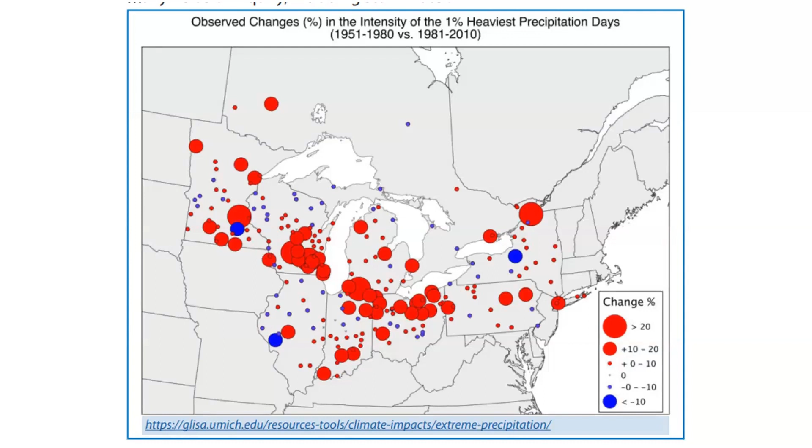And you can see that in this illustration here, because where the lakefronts are, you're getting these 20% changes in the intensity of storm events. You look down where we're at, you've even got some actual reductions anticipated. So there's not really going to be a statewide solution to this. We really need to look locally at what kind of changes are necessary to build in that resiliency.

So we're already approving, building, and designing plans that are perhaps already at that extreme of the 90% confidence interval. So that's something I want to point out here. And we should be looking at ways to build in some resiliency with our current stormwater. So with that, I'm going to move to Geddy and get you powered up here.

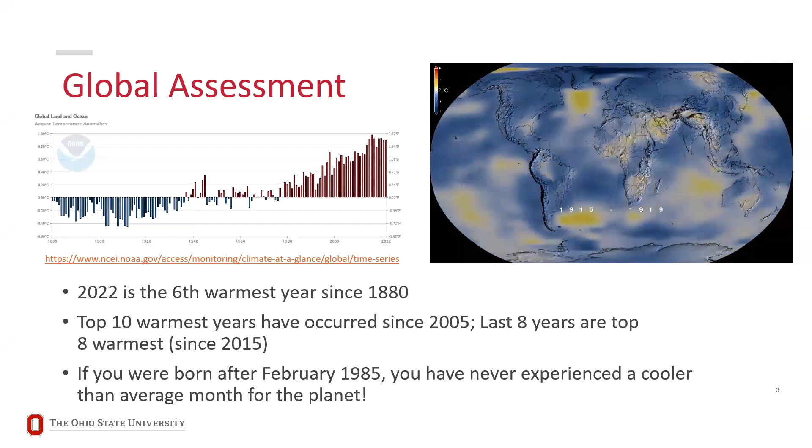In fact, the top 10 warmest years on Earth have all occurred since 2005, and the last 8 years, 2015 through 2022, have all been the top 8 warmest. So this is 2022 back to about 2015. So why does that matter when it comes to water? A warmer atmosphere can hold more water vapor. And as a result, that impacts the patterns and intensity of precipitation we see on Earth.

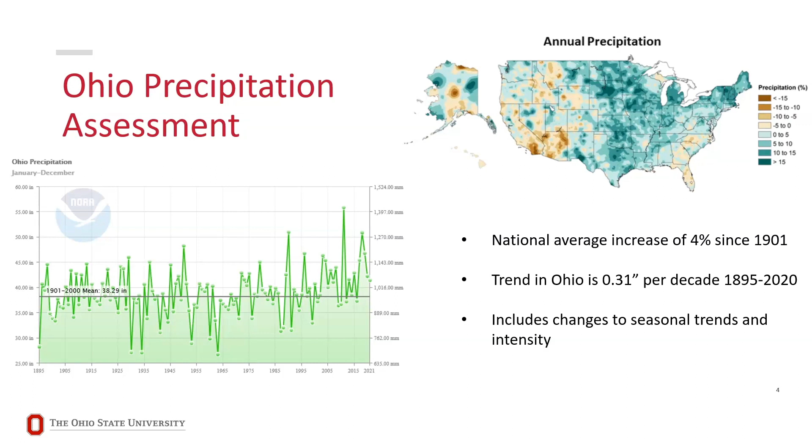In Ohio, this is no different. We've seen changes. The trend in Ohio's precipitation in the climatic record, which in our state goes to 1895, is on the tune of about 0.3 of an inch per decade. So this isn't just plus or minus 0.31 every 10 years. This is intensity and seasonal changes and fluctuations, changes in patterns that we normally see and we normally build our infrastructure around. And you can see this looking at season to season.

So using key months as proxies for seasonal changes, looking at our most recent 30-year climate period, which is 1991 to 2020. These are the NCEI 30-year periods that we use for averages. This is 1991 to 2020 minus the previous 30-year record, 1981 to 2010. Looking at January, we can see around a 10% increase in precipitation in our state in the Ohio Valley. So indicative of wetter winters.

And this trend continues into the spring. So looking at April, we continue to see those greens, those 10, 15% changes, especially concentrated in the lower Ohio Valley and into the mid-Mississippi Valley.

As we move into summer, we see these changes start to kind of wash out, fade away, and we see a little bit of variability emerge. So pockets with green, kind of positive changes, but also some brown negative changes, some lighter browns mixed in with the greens. And by the time we get back to October and into the fall, we see the green start to make an appearance again within most of the state.

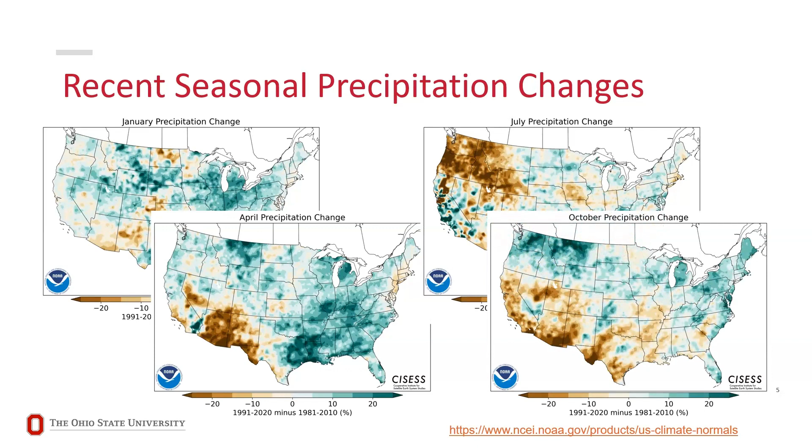So the key takeaway here is that we are experiencing wetter winters and springs, as well as increased precipitation variability locally in our state. We look even more localized, so looking at precipitation intensity in the Columbus area. On the left, we have extreme daily rainfall counts by half decade, or in other terms, the number of 1 inch or greater events experienced at Columbus over 5-year increments. So this is from 1950 to 2019. Each bar is about 5 years worth of events.

And you can see there's a fair amount of variability in the first half of this graph, but starting around the 1985 timeframe, we start to see a persistent upward trend in these bars. And I don't want you all to just look at the bars themselves, but I also want you to look at the breakdown of the colors, primarily this lime green color and this really pale green color. The lime green color are 2 to 3 inch rainfall events, and the pale green are 3 inch plus rainfall events. So these are significant, impactful rainfall events that are on the rise, not just rainfall itself, but the more extreme disruptive events that can overwhelm infrastructure and disrupt daily life.

Looking at this another way, on the right, we have percentage of annual precipitation greater than 1 inch. So what this is saying is essentially, what is the percentage of the total rainfall events each year caused by these 1 inch or greater rainfall events? This data goes from 1948 to 2020, so a similar-ish window. And this trend is also on the increase.

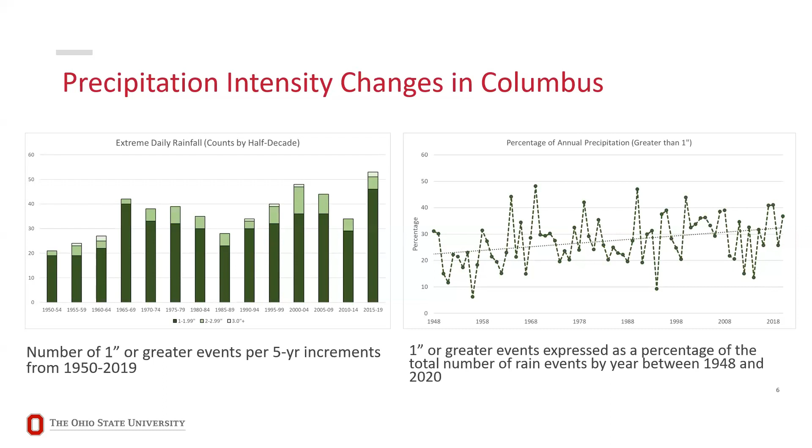At the beginning of this graph, you see a clustering of these points, kind of in the 20 to 30% of yearly events caused by these 1 inch or greater events. As we move closer to present day, that number increases to around 30 to 40%, a clustering of those points. See kind of at the end there. So we are seeing changes both in seasonal trends and in intensity. And as a result, this is causing impacts.

It's no surprise then if we look at our top 10 warmest and wettest years in Ohio, focusing here on the precipitation side, that a lot of these top 10 years are fairly recent. In fact, 8 of the top 10 wettest years in Ohio are after 1990, and 6 of these top 10 occur after the year 2000. So fairly recent turn of events here. And this in turn causes numerous direct and indirect impacts.

So Dave did a good job of setting this up for me. Atlas 14 is the official peer-reviewed record of precipitation frequency estimates for the United States and its affiliated territories, produced by the Weather Service. This was the data in Dave's graph that he was discussing moments ago. And this is where one of the indirect impacts really comes into play, because a lot of this guidance is used by you all in some way, shape, or form when it comes to infrastructure design, water engineering, whether it's stormwater, wastewater, other water utilities, etc. And what we're finding is that this data now is not accurately quantifying what we're seeing.

So Ohio is located within volume 2 of Atlas 14, which covers the Great Lakes and Mid-Atlantic. This was released in 2004, but the records of this data only cover up through December 2000. It integrates daily and hourly stations, and it integrates a fair amount of data, but then it stops, right? And we're all the way forward now here into May 2023. So almost 23 years of missing data.

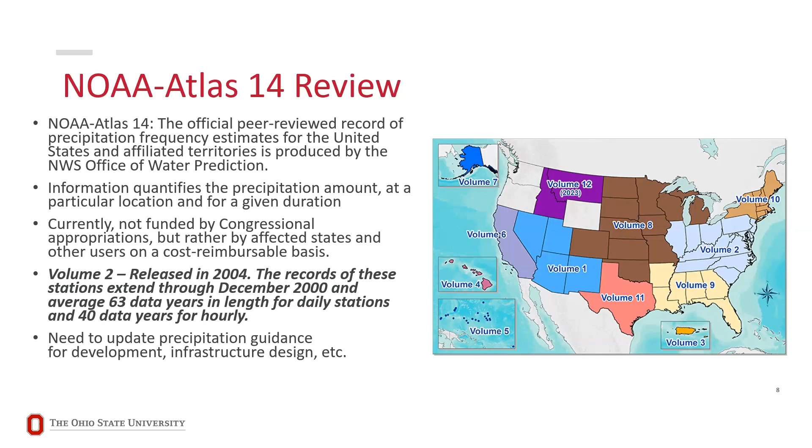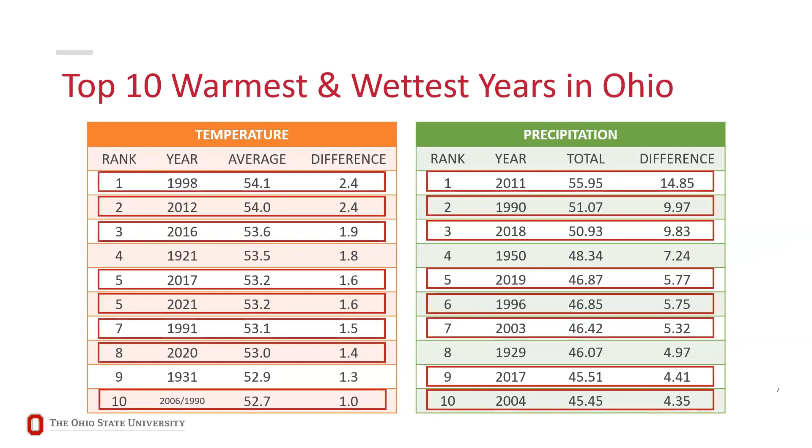But thankfully, we're not the only ones who recognize that. NOAA, within the last year, has put forth a national effort summary called Our Changing Precipitation, where it overviews this problem as well as a problem with the methodology within Atlas 14, which is that the guidance within this program is based on a concept known as temporal stationarity, which essentially assumes that extreme precipitation events do not change significantly over time. But looking at the data on these slides, we're learning that that's not the case, right? These events are changing over time. And as a result, that impacts our guidance.

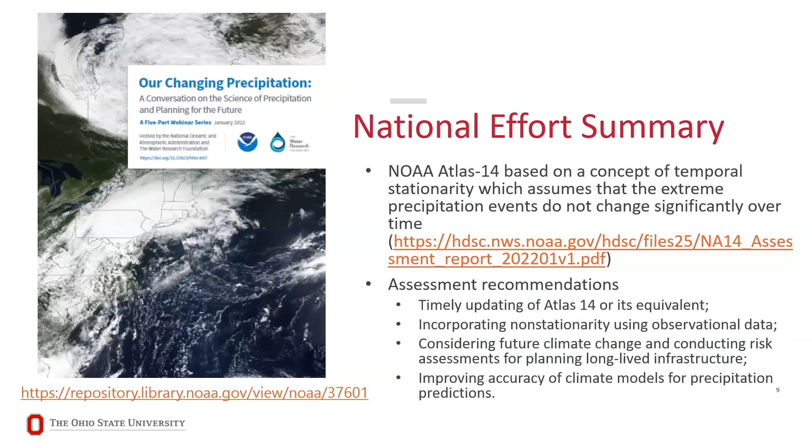So NOAA put forth a recommendation summary advocating for a timely updating of Atlas 14 or the development of an equivalent that incorporates non-stationarity and new observational data, as well as considerations for future climate change and risk assessments for long-lived infrastructure and design plans. There's also provisions in here to improve accuracy of climate models for precipitation predictions.

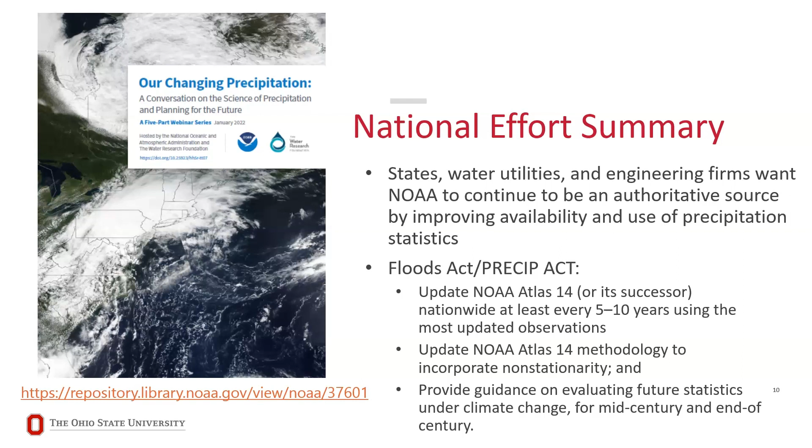And believe it or not, this has moved forward within the federal government. So at the end of last year, a majority of these bits and pieces were integrated into 2 pieces of legislation, the Floods Act and the Precip Act, which have been essentially approved and passed through Congress and have led to an official update of NOAA Atlas 14 or a successor program to be coming nationwide down the road and to be updated at least every 5 to 10 years. These updates will incorporate those methods of non-stationarity and evolving data and guidance that I have brought up here in this first portion. So are there any questions about this so far?

I have these checkpoints built in because there's a lot I want to go over, and I don't want to just cram all the questions to the end. So this is just kind of the overview of where we're at right now before I go into some of the work we're doing locally.

So the Atlas 14, is that being implemented now? And then Atlas 15 is coming, I heard 2027, is that? Yeah, so the updated Atlas program, whatever it may be called, right now it's in a national committee review, essentially. So it's working through the process of developing a methodology, getting approved by the National Academy Review. Thank you, Jason. So it's going through that process of being reviewed and implemented, but that process from the federal government side is very slow. It's very methodical, and odds are, yeah, 2027 at earliest for those official projections.

Those are just for Reader's Digest version of what that is. That provides guidance on precipitation. Yes. So it provides guidance on precipitation and probability of occurrence, basically. So when you look at NOAA Atlas 14 data, you essentially either get a recurrence curve or a tabular set of data. And within that data, you typically see precipitation amounts or depth in inches, and then average recurrence intervals. So when you hear an event was a 100-year event or a 500-year event, that's essentially a probability for the odds of that event to occur within your local region. It's not necessarily something that'll happen once every 500 years, but rather a 1 in 500 chance of occurrence.

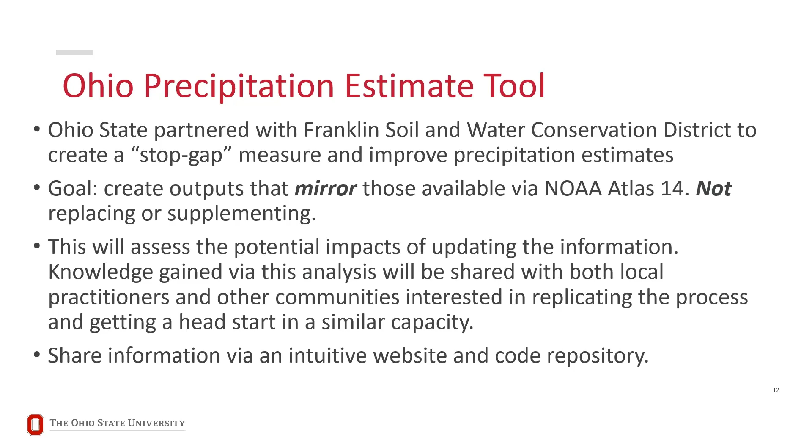This will assess the potential impacts of updating precipitation information, and knowledge gained via this analysis will be shared with both local practitioners and other communities who are interested in replicating this process or getting a head start in what changing precipitation projections may look like. And this will be shared via both an intuitive website and an accessible code repository.

So how do we do this, right? The best way to go about breaking down what we've done here is to compare some methodology first and then go into some of our results and then some of our outputs. So looking at Atlas 14 again, Atlas 14 uses daily and hourly station precipitation data. It then goes in and does a lot of statistical work.

So it utilizes a statistical method called a generalized extreme value function combined with some statistical regions called L regions to essentially fit a distribution function to precipitation data. Now, I was not a fan of statistics in high school or college, so I don't want to go too far into this rabbit hole.

But what you essentially need to know is that this is a method used to approximate models of maxima, or extremes of long sequences of variables. So it takes this long sequence of precipitation data and models it to bring forward the maximums of projections. This does really well, but it leaves little room for variability, especially regarding extreme or changing precipitation events.

Not to mention that Atlas 14 also had to make multiple consistency adjustments with their data to get things to fit properly and to process properly. This includes adjusting daily and hourly station quantiles where there may have been overlaps. Same thing with the confidence intervals. If there are overlaps or missing gaps, these things had to be adjusted.

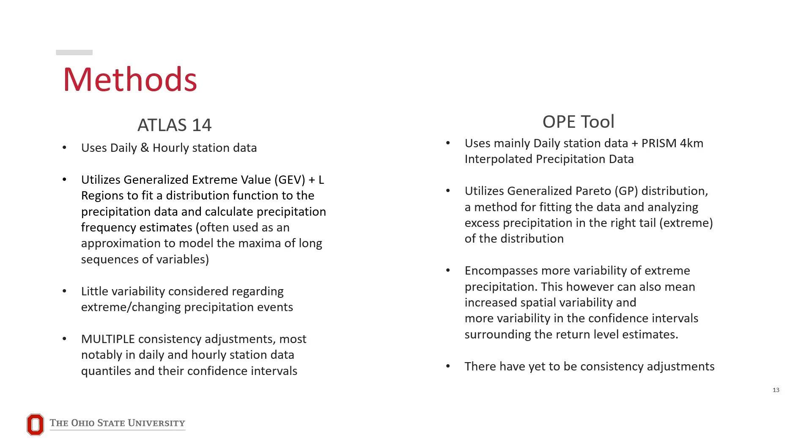As far as choosing stations, there are 6 active cooperative or ASOS stations in the Columbus region in Franklin County. Each one has a varying historical record. John Glenn International Airport is known as Columbus's climate site. That's where the Weather Service operated and maintained station is, and it has a record from 1948 to present. So that is one station we included in our analysis.

There's a station up in Westerville, which is a cooperative observer station, which is, again, a cooperation between the Weather Service and private observers. This record is the longest available record in Franklin County.

This is 1896 to present, still in operation and still provides data to this day. So we included that station. But then other stations pose some problems for us. There's a station up in Easton that had a record of 1975 to present, but it had so much missing data in it that it was essentially unusable. It had over 775 missing data points just looking within the last 30 years or so.

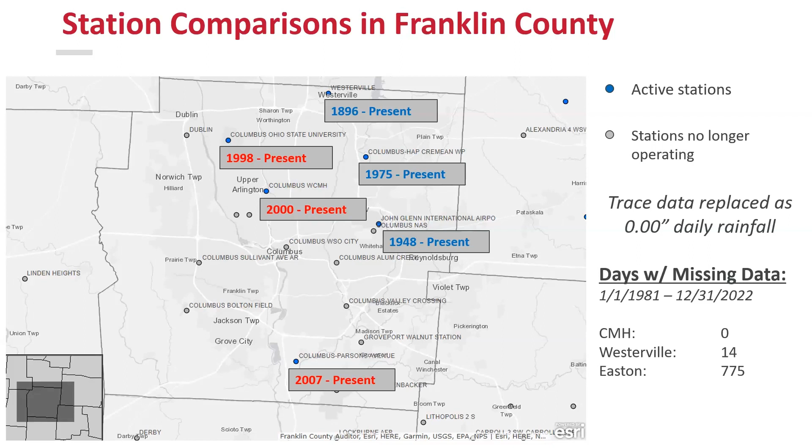And there are other stations such as KOSU and WCMH and Parsons Avenue that are still active and are relatively new, but this brings the drawback that the records at these stations are not very long. So they're not very suitable for the analysis that we were trying to do. However, there are also numerous stations in the Columbus area that operated in the past and are no longer operating.

So we found a station on the west side of Columbus at Sullivant Avenue that had an intact record from 1952 to 1983. When 1983 came around, the station fell out of operation. So what we did is we took this historical record of this station and attached the PRISM data set to it to fill in the gap from the 1983 station quit date to the present day.

And this provided us with some proof of concept for using this PRISM data set to help supplement current and active station data. And as a result, we ended up with 3 stations in our final analysis: Columbus CMH, Westerville, and Sullivant Avenue.

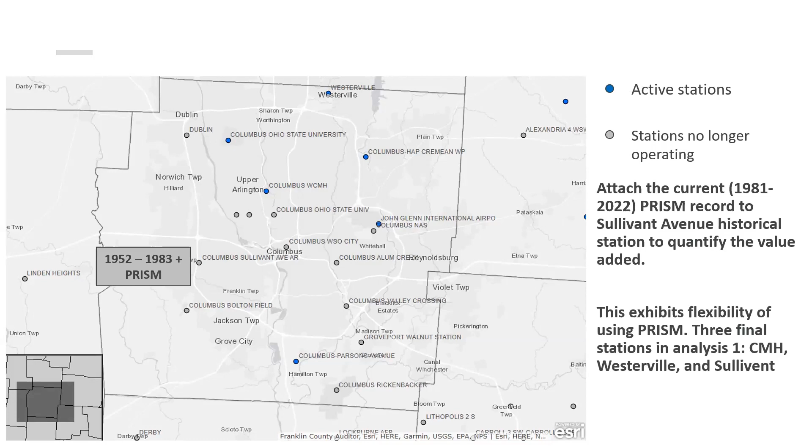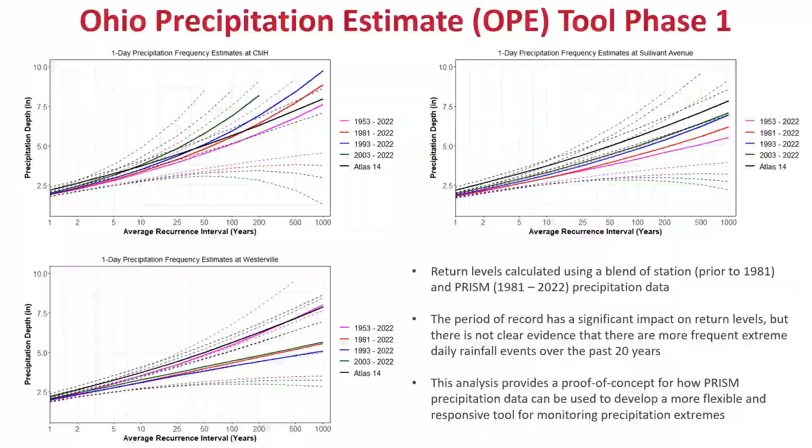So we then integrated this into a user interface website. This is the Ohio Precipitation Tool website. It comes with a map of the stations that we included in our analysis, as well as tabular and graphic outputs for precipitation frequency estimates at our stations. The tabular data includes 95% lower and upper confidence intervals, as well as the estimates and return periods.

And we have drop downs and graphic selection for stations, as well as different periods and sources that I went through in the previous slide. So we have Atlas 14 in here, but then we have our 1953 to 2022 analysis, and then the PRISM data set, and then most recent 20 and 30 year intervals.

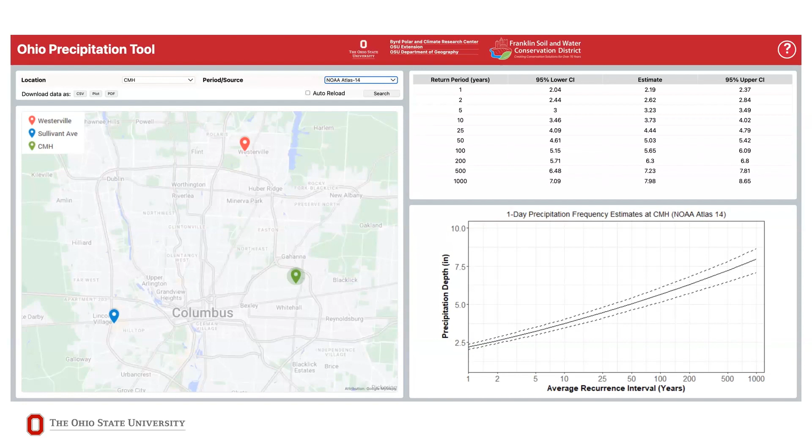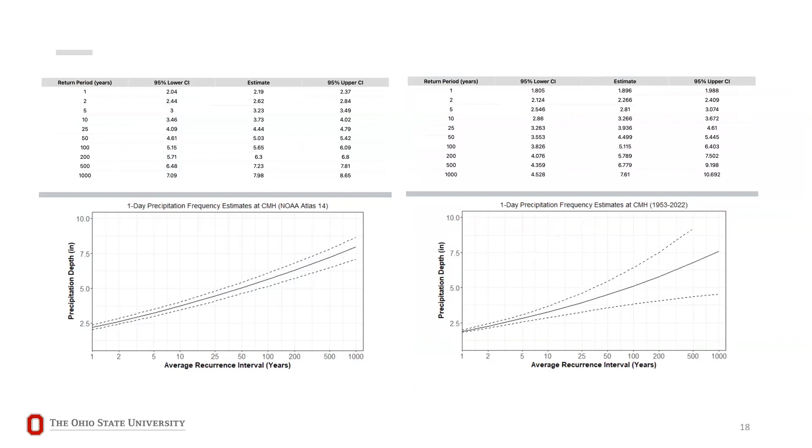And you can run multiple comparisons using this website. So we have it set up so that all of our tabular and graphic outputs can be downloaded and compared. Tabular outputs can be downloaded via CSV files. Graphic outputs can be downloaded via PNG files. And then if you want to run page-to-page site comparisons, you can download the comparisons by essentially a PDF of one location versus the next location on the web page. And you can use this to do multiple different analyses of different time periods and different station locations to assess this variability.

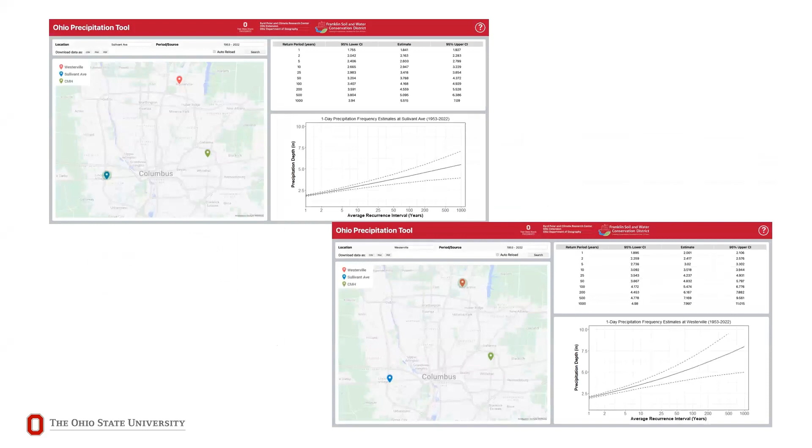This project has also resulted in a complete PRISM database. So we decided to store the precipitation data that we pulled down along with our code in an accessible code repository at Ohio State. This code can be used to interpret which distribution fit can be used to model precipitation frequency. And the PRISM data can be interacted with. So any data at any location can be subset and determined based on latitude, longitude.

We also have code to create the graphic and tabular outputs that are included on our website and compare different configurations. So this project can be easily adapted to other areas in Franklin County, to regions beyond Franklin County, and maybe even eventually into the state of Ohio as a whole, as we continue to wait on updated official federal projections. We also have a draft summary coming out of all the back-end analysis soon.

Okay, that was a lot. So here's checkpoint 2 for questions. Yes.

I'm not familiar with PRISM. What's the source of that data? Sure. So PRISM is a collaboration between, I believe it's Oregon State, who collaborated with NOAA and some others to create this large spatially interpolated data set. I'll look that up and confirm. It was a big effort with a few different Western universities and partners who were involved in producing this. So it's well vetted, but it's 24-hour interval.

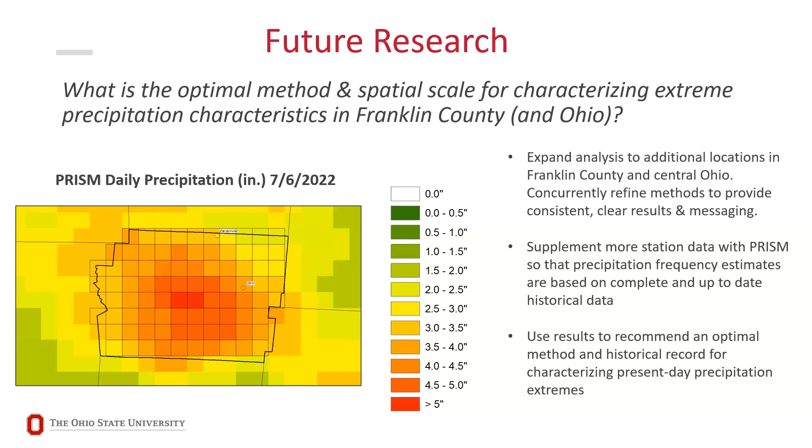And finally, we want to use the results to recommend an optimal method and historical record for characterizing precipitation in present day. So again, like the questions in the back were saying, which graphs should we use? Which data should we use? We want to be able to recommend that with some confidence until this Atlas 14 update can come out.

So in summary, in this first phase, we have updated historical data through present day and expanded the number of point-based precipitation estimates in the county using these 3 stations. We created point-based precipitation recurrence intervals based on this updated data. We created an end user interface and website designed to emulate the function of the current Atlas 14 product. And then we've shared this with internal and county stakeholders to evaluate its use and design.

Those surveys are actually still circulating. I know we've done some stuff with MORPC and Franklin Soil and Water to get this out to key stakeholders, but there's still more to do. And then we have an initial publication that is being put together of our findings and results as well. So a lot of the content that I've just talked to you about will be in this publication.

Phase 2, what we hope to do, this is something that is still in its infancy and has not yet been funded, but we hope to find somebody who sees the importance in this work and push this forward. So we want to expand the scope of the project to other areas in Franklin County and beyond, and continue to revise our methodology. We want to use our updated projections to evaluate other aspects of the physical modeling space.

So how does this data go into models that engineers use, or how does this go into models that insurance adjusters use, or how does this go into models that the city uses? And then with these updated projections, we can maybe even begin a broader conversation with key stakeholders for decisions such as design and planning, et cetera. Again, before the Atlas 14 update even comes out, we hope to start to have the ball rolling on some of this process.

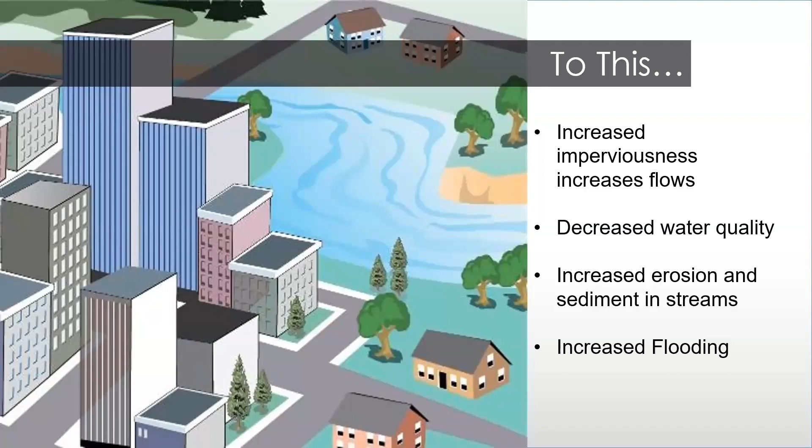Before climate change was a thing, I used to preach that if you have more impervious surfaces and you're not doing something about it, you're going to have unhappy streams. And what did I mean by unhappy streams? You have streams that were imploding on themselves. The erosion was happening on the sides. That graphic over here on the right, I mean, this is what streams look like even to this day. This is streams in central Ohio, right? Maybe not all of them, but we have a lot of unhappy streams. All of that increased impervious surface has devastated our natural infrastructure.

So what do we really know about climate change? And I'm going to read this. This is from the US EPA. Climate changes, including more frequent and intense storms, more extreme flooding events, and it can increase stormwater runoff. An increase in stormwater runoff can exacerbate existing and introduce new pollution problems. Whoops.

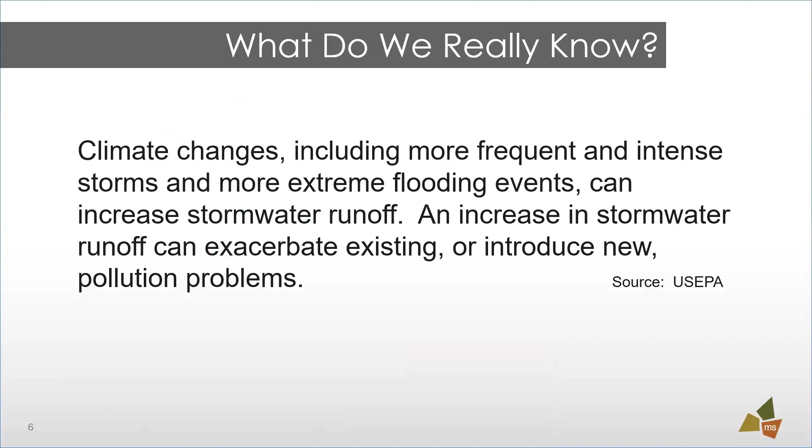The other thing we know about climate change in the state of Ohio, the average temperature in Ohio has risen 1.5 degrees since the beginning of the 20th century. Droughts have also increased. Now, we're an agricultural state, so this is a big deal. I know there are some people that kind of roll their eyes when they say droughts. It's like, hey, I'm okay with all the sun, but that really impacts the economics of our state of Ohio.

And the other thing that's probably the most important, at least to me as a CFM, a certified floodplain manager practitioner, is that we're seeing increased heavy rain events. And the increased rain events that we're seeing are those 2-year extreme events. And this is one of the statistics. This came from NOAA. This is the one that affects our natural infrastructure.

You know, we have 100-year events. That's the big dog. And dare I say, that's not even the big dog anymore. We're having the 500-year events. But those 2-year, those 5-year, those 10-year events, those are the ones that are affecting our infrastructure and affecting our communities. And they're so repetitive. It's hard to be resilient against those types of storm events.

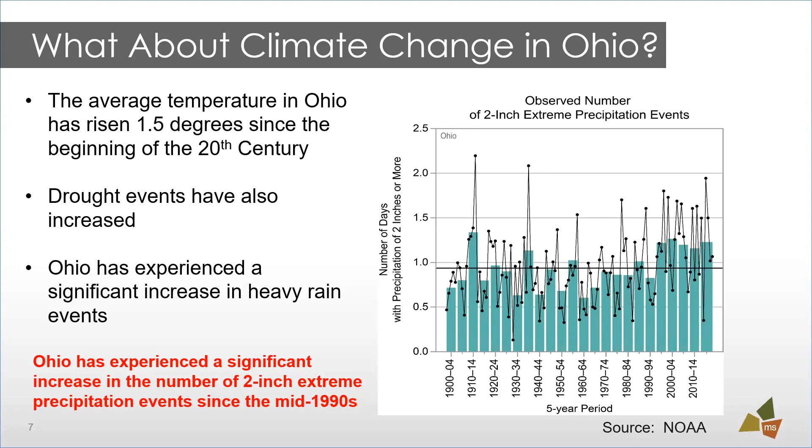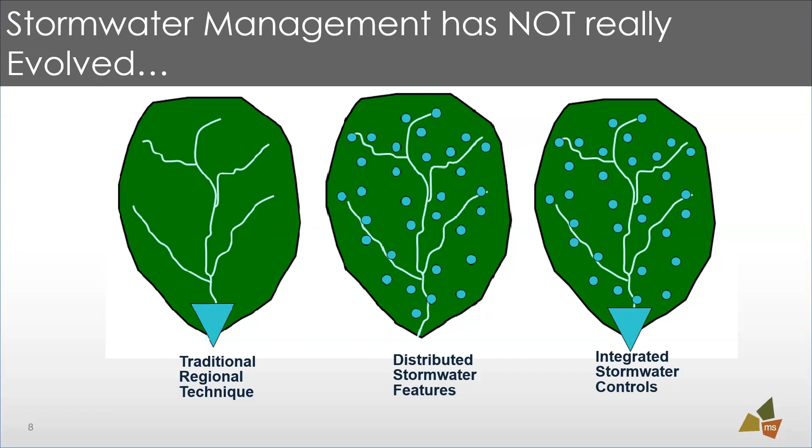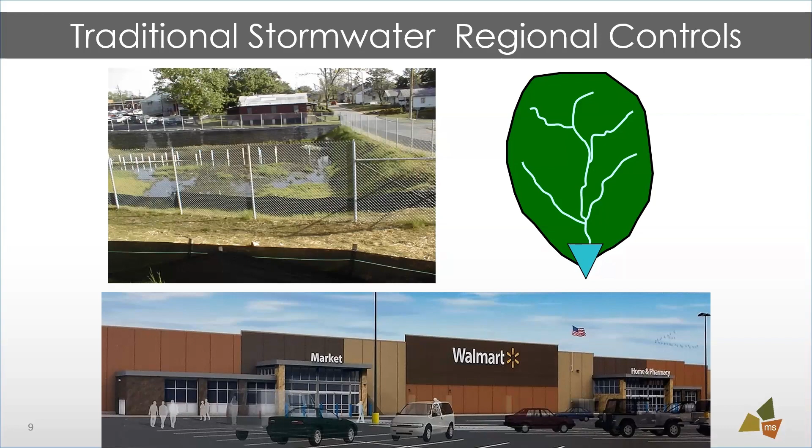The only large scale green infrastructure practice that I know of that took a different route was the Franklin County Jail that's been put in. They put in a pervious application. Now we've got great examples of green infrastructure all over the city, but with this we had to flip the script with them. We showed them why this made sense via a life cycle cost, why putting in a permeable practice for their parking lots made sense.

So this is a project I was part of back in, this is crazy to say, 2006, we installed green infrastructure. This was up in Minnesota, and it was very much a pilot project at the time. The exciting part about this study was they were looking at water quality benefits of green infrastructure. They couldn't monitor the water quality because the bioswales and rain gardens they put in collected so much water that nothing was coming out. So this demonstrated to me that green infrastructure is working. We have to figure out a way to put it into the norm, into the regular mindsets of us designers and practitioners, and how this might work in our existing systems.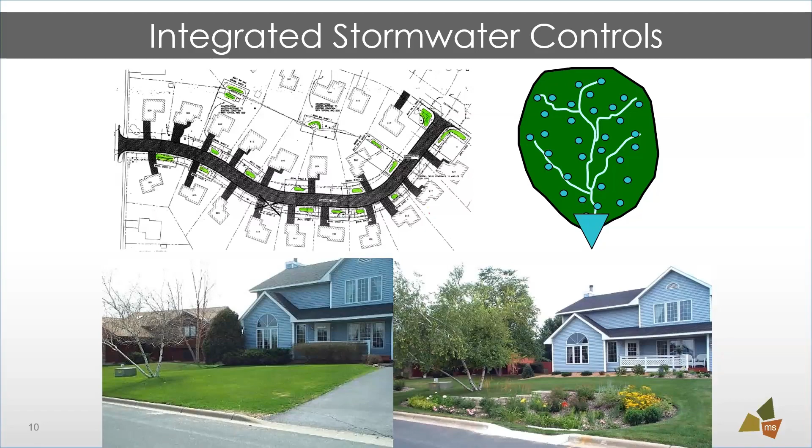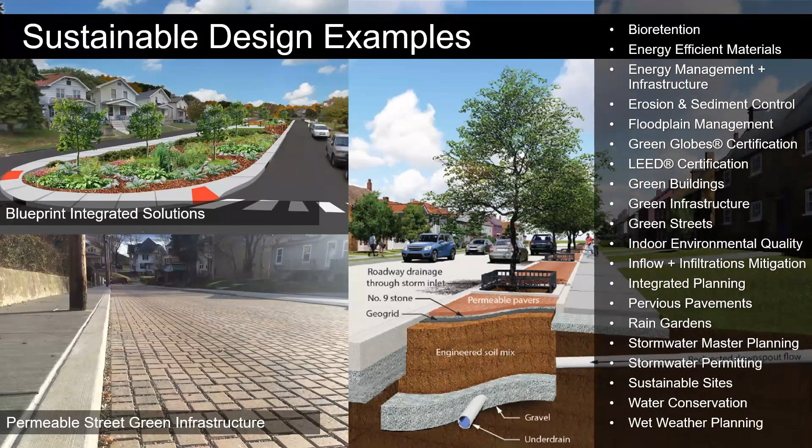So I'm going to talk a little bit about some of the proven GSI systems that we know work. And of course, these are some sustainable examples. It's a very long list of practices, everything from bioretention, like you see in the top, to the permeable pavers. I'm going to talk a little bit about several of these projects. And we know that many of these do work, and some of them just don't work well where they were sited. And that's part of the issue with green infrastructure: a lot of folks say, well, it didn't work, so I'm just going to go back to the traditional approach. And it's like, well, that didn't work there because you didn't site it correctly.

So as a CFM, I look at green infrastructure as a solution that we should really be looking at to address those smaller events that we have. And I had this PowerPoint slide somewhere else, and I said it didn't impact large events. Well, I changed it because we know that green infrastructure and other sustainable practices do help with the resiliency of your system. So a good example, I'm going to go off script real quick.

So you have all of these storms hitting the East Coast. Superstorm Sandy was a good example of one that came through. And you're spending millions of dollars reestablishing the coastline. And the question is what can you do to armor that system so that when that next storm comes, because it's coming, you can be better prepared and more resilient? So we know that sustainable design provides resiliency. I'm not saying it solves it. It won't solve it, but it will provide the resiliency to come back after the storm event goes through.

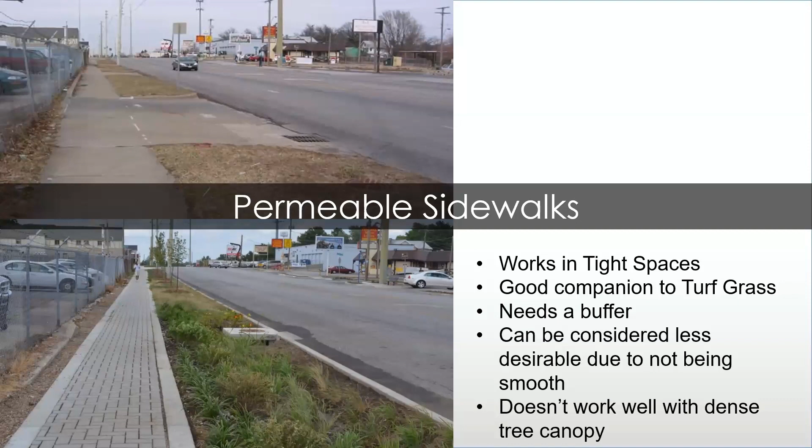Permeable sidewalks. This is a good technique that works. It usually has to work in tandem with turf grass because it needs some type of buffer to allow for sediments to get into that turf grass, because if it gets into the permeable system, then it may not work as well. Permeable streets, this was put in back in 2015. This is on a 7% grade slope in the city of Pittsburgh. And it is working very well. In fact, it is a pilot project that now is the norm when we have to rebuild streets in the city of Pittsburgh. So I'll show you a little bit more of the design here.

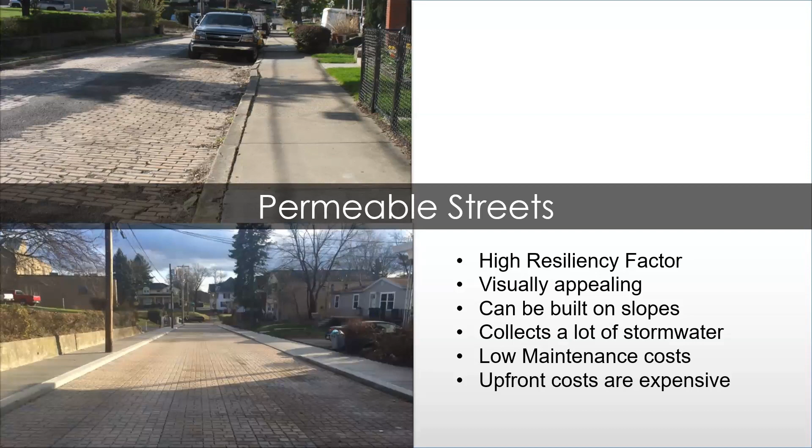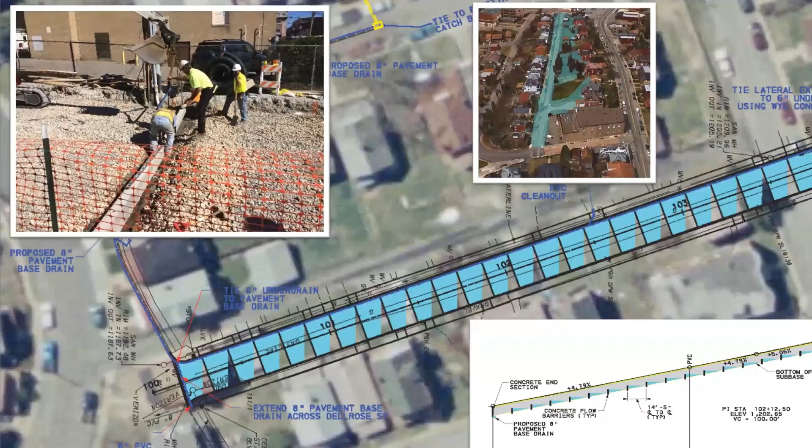Okay, there it is. So it's a series of check dams underneath that allow it to infiltrate and drop in. And then there's a cleaning system, just two regular pipes on the sides that help with sediment. And they did not think it was going to work. And these are the kind of projects that I love, when they say that they're not going to work, and it is working and functioning well. And it is, like I said, now the norm for very steep streets that are getting redone in the city of Pittsburgh. Here's some pictures of it.

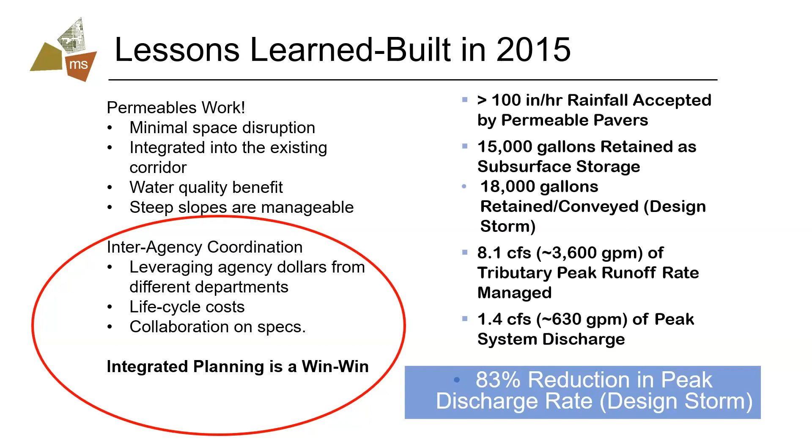So one of the things that we had to grapple with, though, and I could do a whole presentation just on this, is it was a great pilot and experiment, but getting interagencies to agree that this was acceptable was a very big lift. And I think what it highlighted was a lot of the issues with the installation or consideration of sustainable practices is because each agency didn't agree with each other. So it came down to looking at ways to collaborate on the specs, and the integrated thought process for this project was a win-win.

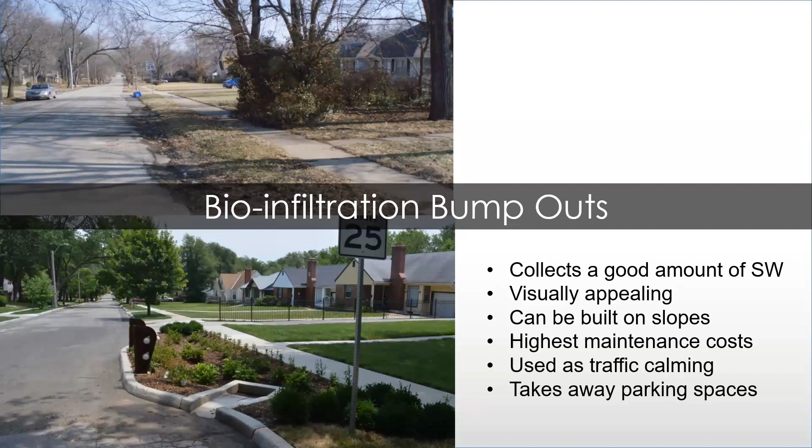Bioinfiltration bump outs, we've got several of these in the city of Columbus. We've got bioinfiltration. This one is in Kansas City. They collect a lot of stormwater. They're visually appealing. We do have some issues somewhat if there's a lot of parking on the street and you're taking away people's parking. I think we know now in Columbus that the maintenance on these is rather high expense compared to maybe some other techniques, but it is still something to consider and look at.

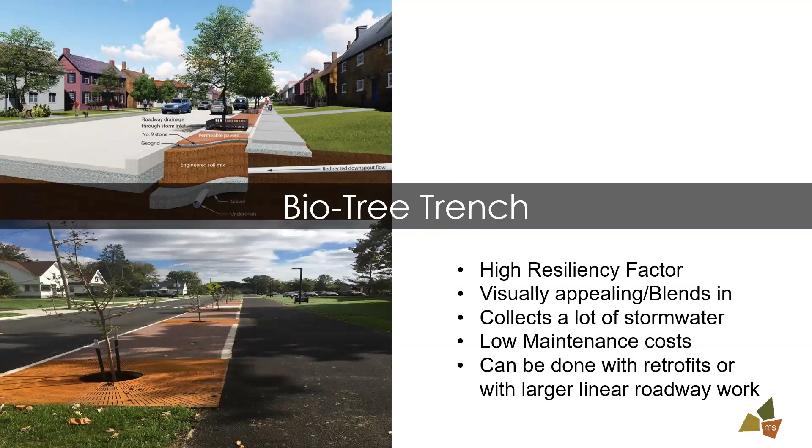This is just a picture of the city of Columbus and one of our practices in, I can't remember the name of the area. It's coming up next here.

So one of the things I mentioned about integrated planning, one of our first Blueprint projects, we had a lot of opportunity for the use of green infrastructure, but we also had a significant amount of flooding that still stuck around after we were doing some of the initial calculations and analyses of what needed to happen. So when I use the words integrated planning, or integrated strategies, it is looking at what green infrastructure does in tandem with maybe upsizing some of your system.

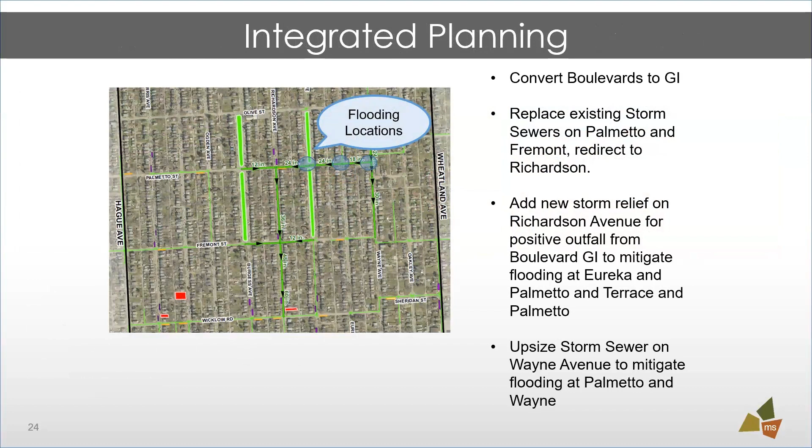And in this instance, it got rid of the flooding and the green infrastructure worked as needed. But if we'd just installed the green infrastructure and didn't fix the stormwater problem, it would have been a failure because people would have asked, what is the green infrastructure doing? So this was a good example of how integrated planning does work. And this just shows you, by replacing the existing storm sewer and adding some storm sewer relief, we helped to upsize that system, and now that area is free from localized flooding.

So this integrated planning is a win-win. Blueprint vision has evolved: water quality first, with direct benefit to quantity, and it was very cost effective.

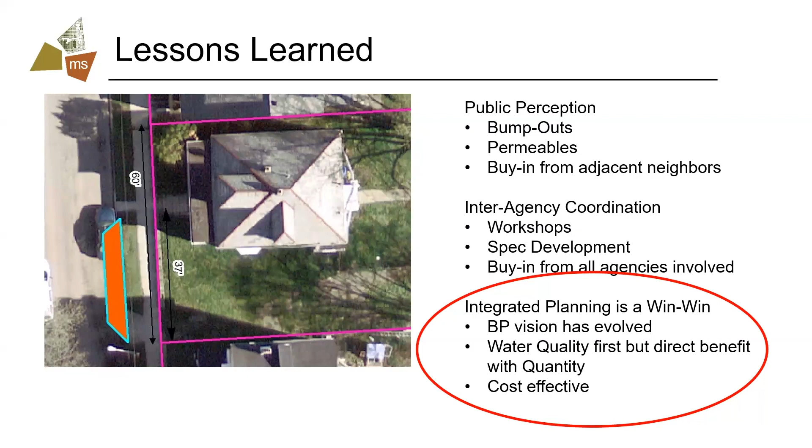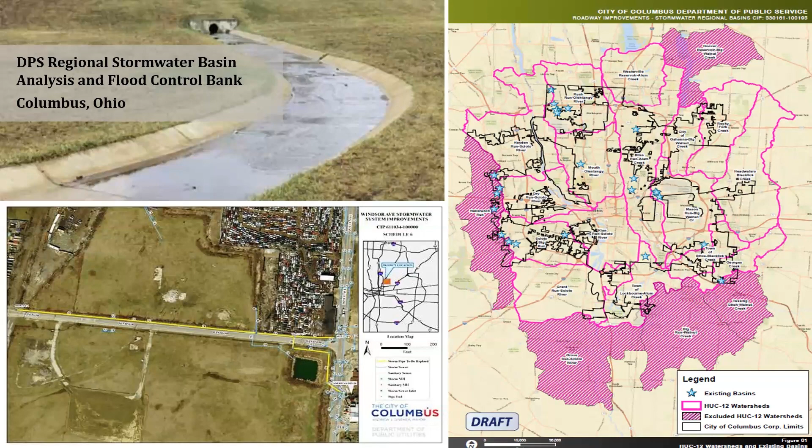A little nod to, as I had mentioned earlier when Geddy was up here, we do some pretty advanced stuff in the city of Columbus and Franklin County, and this is one of them. This effort to evaluate regional stormwater basins within the city of Columbus has taken off and been quite amazing. It's a great example. We use this in other places. We say that this is a great thing to copy because of how they're looking at controlling stormwater on a larger scale.

All right, flipping the script. This picture came from Cleveland Magazine, and it was interesting because the article focused on how Intel was affecting them. And so I think about that, and I think we're all content and happy to talk about how we manage stormwater here in Franklin County, but at the end of the day, we're building stuff here in Columbus that we weren't intending to build for 30 years. And this development on the eastern side of Columbus will impact all of us.

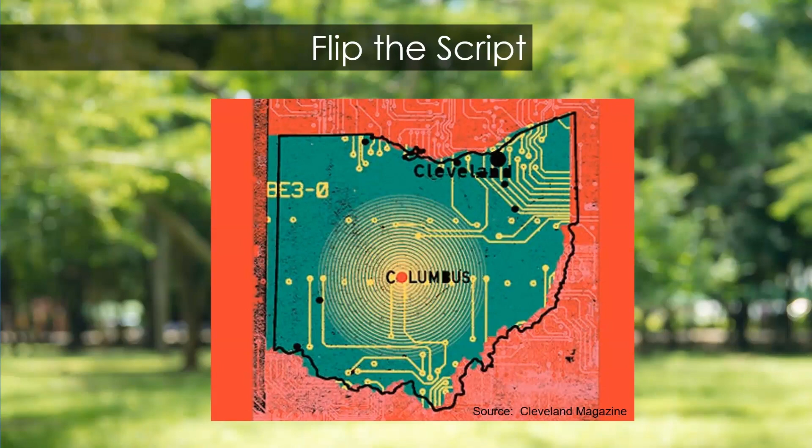And so one of the concepts or ideas is to flip the script. So you have regulations for stormwater management. You've had them and they've probably never changed. And I'm talking even Licking County has no advanced standards. It's the way that they've had them. Their subdivision regulations are the same. And dealing with developers, they're not amenable to change. However, if you don't affect their time and money, they'll do it.

And so a lot of communities have given a nod to sustainable design, but they say, here are the options. You can do it the traditional way, or you can look at these green infrastructure practices. Well, given the choice, they're going to pick the traditional design every single time. So why don't we promote the idea of having the advanced standards first and say, this is what we want for our community. We want you to look at different types of stormwater controls, and incentivize them to do that.

Maybe put them up at the top of the list to be reviewed, or however you want to do it. But I really challenge us as practitioners that we need to start looking at this and not just do it the old-fashioned way and then come back in 25 years and retrofit what we designed then. So this is something, you know, I said, how would the development community feel about this? Like I said, it's all about time and money.

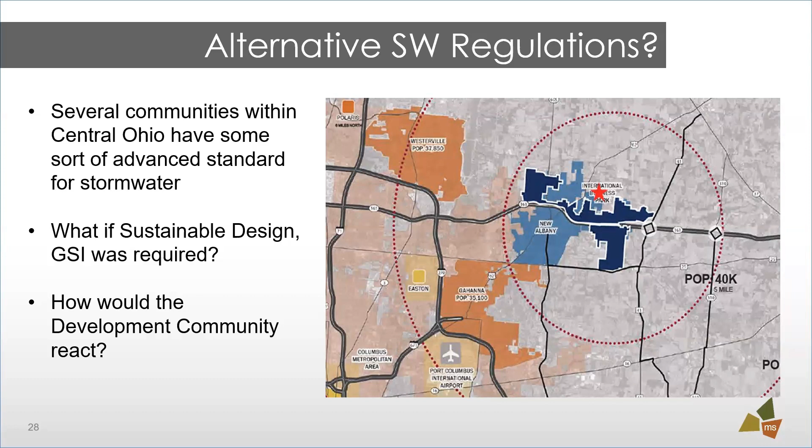Last thing, as I said, I am the chair, and the only reason I'm a chair is because somebody asked me to do it. I do find it fascinating. My husband doesn't necessarily believe in climate change. It's always a fun conversation.

However, me, I look at the data. I see the people being more impacted by storm events. I see people who are on the floodplain fringe that are now 100% within the floodplain. I see people on the East Coast that have houses that they thought were going to be there forever that are falling in. And that is change. We are evolving. And so we should be looking more at how we can understand the data and use the data to the betterment of us.

Now we're in the state of Ohio. Maybe people would say, well, that's not a big deal here. I really think we have to be looking more critically at how we handle and manage stormwater. We're trying to be a vehicle for those local rural communities that maybe don't have the ability to understand, comprehend those standards, and provide them maybe with language that they could consider, that they could put into their regulations as an addendum for larger scale developments or even single family developments. That is what we're trying to do. And listening to the experts like Geddy and OSU on what it is that we should be considering.